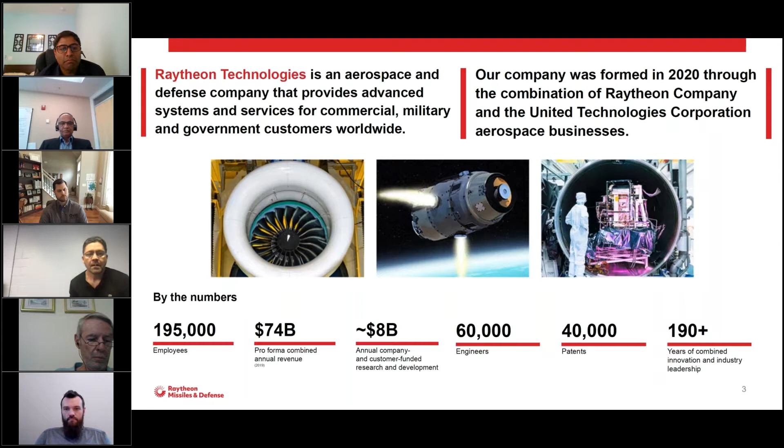Everybody knows Raytheon, I'm sure, on this call. But last year, in the midst of the start of COVID, we shut down in March, and in April they went ahead with the merger to form Raytheon Technologies, which was the union, essentially, of Raytheon Company and United Technologies. I'm not going to read all those numbers, but we were big, and now we're even bigger.

So what is RURI? Some of you may have heard of this, but it's a very different model for working with the university. I've worked with a lot of different universities—you give them a statement of work, some funding, fund a graduate student or two or three, meet with them maybe once a month to see how their progress is going. It can be very interesting and informative, but it often goes in a very different direction than maybe you'd originally hoped for.

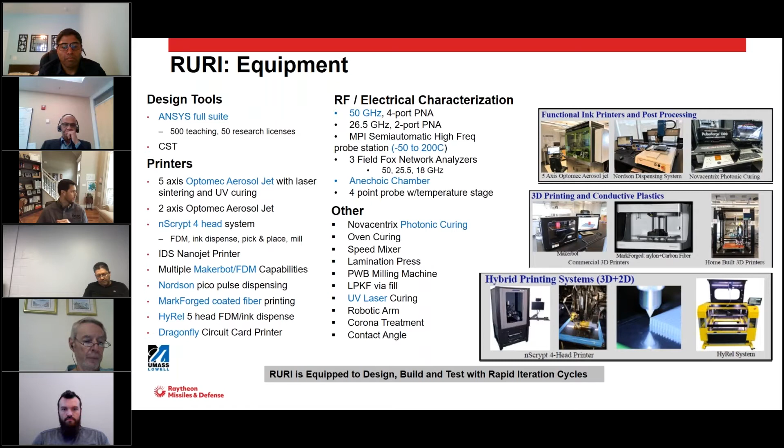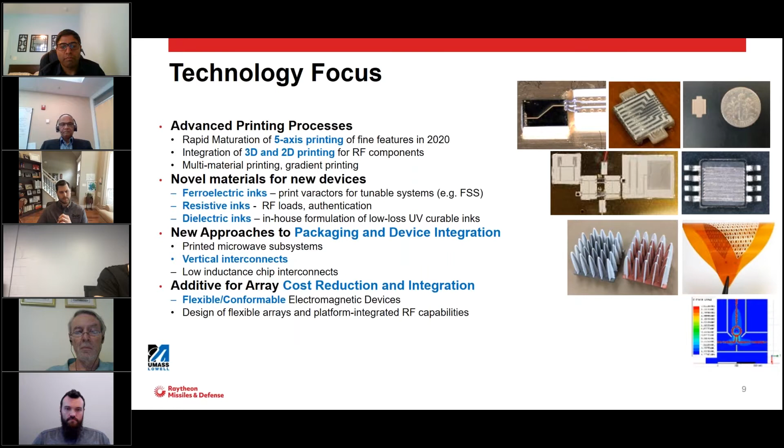I personally was not very involved with this dielectric work, but it's a pretty important feature that we developed through our RURI partnership, so I really wanted to at least touch on it. This is the development of a BST ink, barium strontium titanate. It's been around for a long time, but the beauty of this material is we can basically help control and tune the dielectric properties over frequency.

It has a relatively low loss tangent, 0.01, which for a printable material I would say is very good. We've been able to make a mix of these across various dielectrics, so we're looking at these for a variety of applications.

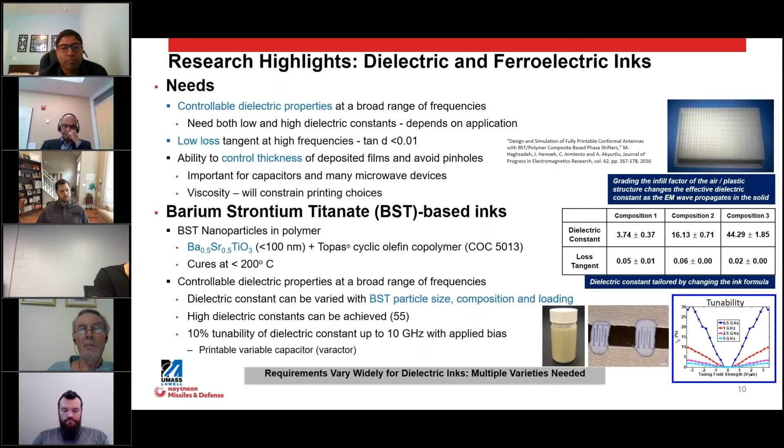Here's one of those applications, which is to make a printed varactor. What you can see in this picture is interdigitated capacitors, a whole suite of printed interdigitated capacitors. Depending on what BST ink we coat on those interdigitated capacitors, we can essentially tune the surface. So this is a very nice development.

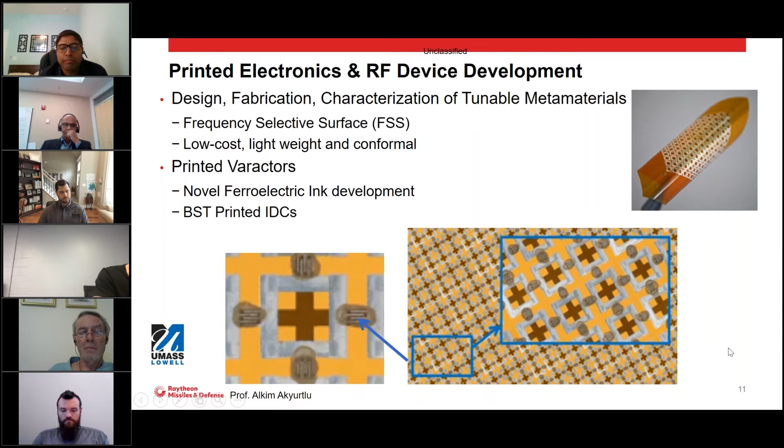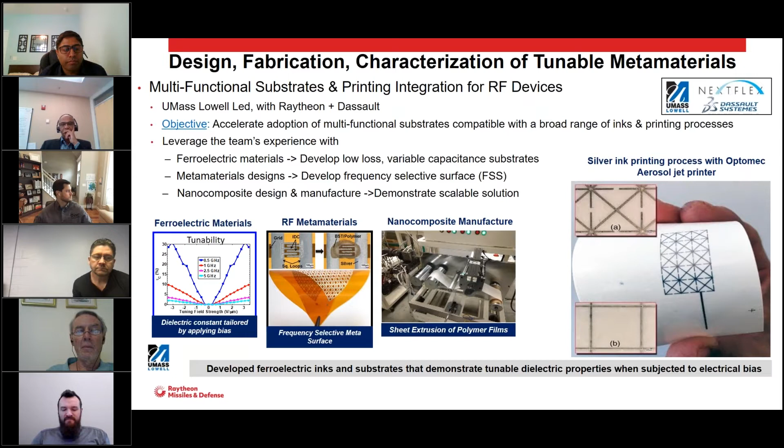We have the opportunity through some of the plastics engineering departments to extrude polymer films and really go into volume with something like that. It's not as much as what I'm particularly working on, but it's an emerging application that we're interested in pursuing for a variety of antennas in particular.

Now we're going to get into more of where I've been focused, which is a lot on what would be essentially the RF front end, transceivers, etc., for radar systems and telecommunications. Before we got into any of the additive world, it all starts on really understanding our material sets.

As nScrypt is well aware, printing has been around for a while, printed electronics has been around for a while. I would say it's only relatively recently that the materials have gotten to be of interest at high frequencies, meaning improvements in dielectrics and conductors. And of course, one of the things was just to develop a very quick, simple way to evaluate a wide suite of materials, both from outside vendors and internal development.

We also have TRL structure, so we can do a full calibration up to 40 gigahertz, and then we can print our lines and really get our insertion loss and see where we are.

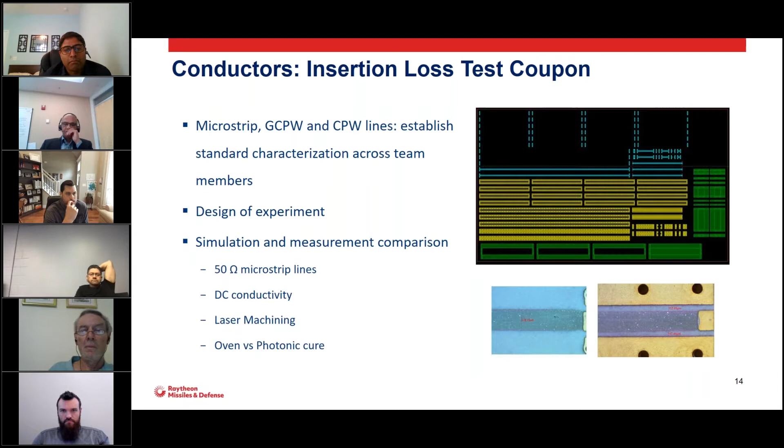Here, for example, is just a couple of inks that we looked at compared to ENIG plated copper. Now pure copper would be a little lower loss, but this is ENIG plated copper, and we looked at various curing methods. So again, a nice screen to see where we were when we were starting.

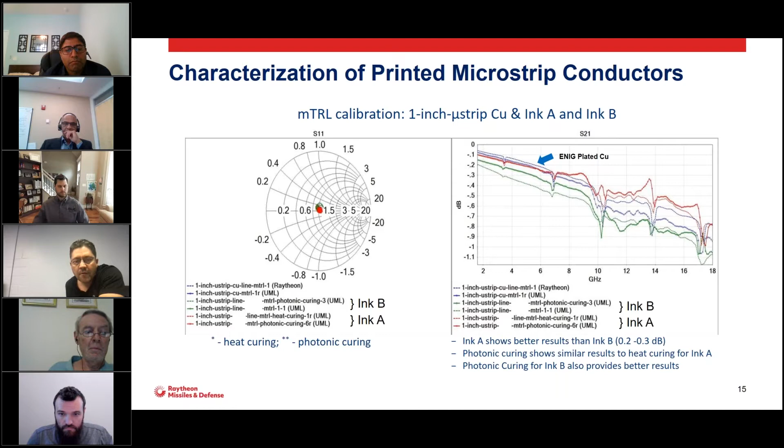We also characterize our dielectrics. We actually make a few of the dielectrics. Our choice is generally to buy our inks - that's always our first choice. We generally make them when we can't buy what we need.

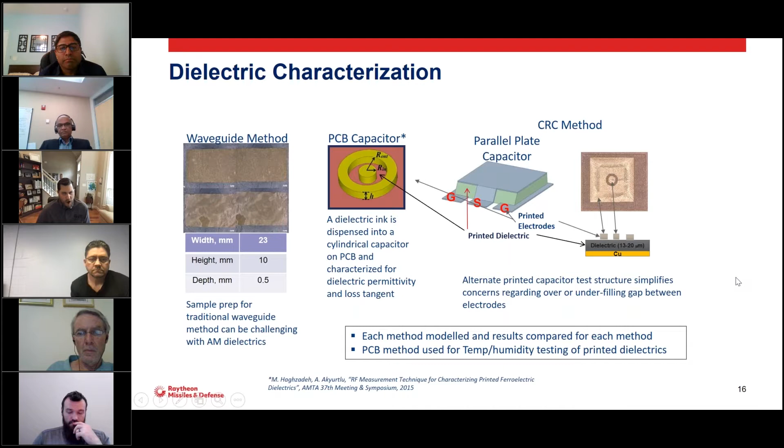So we start with this, we down select, and then we go to the waveguide method. And then once we've done that, there's more to it before we really start to print.

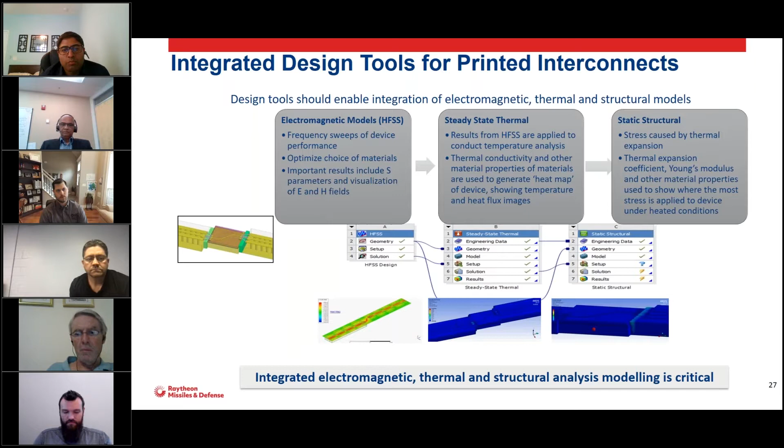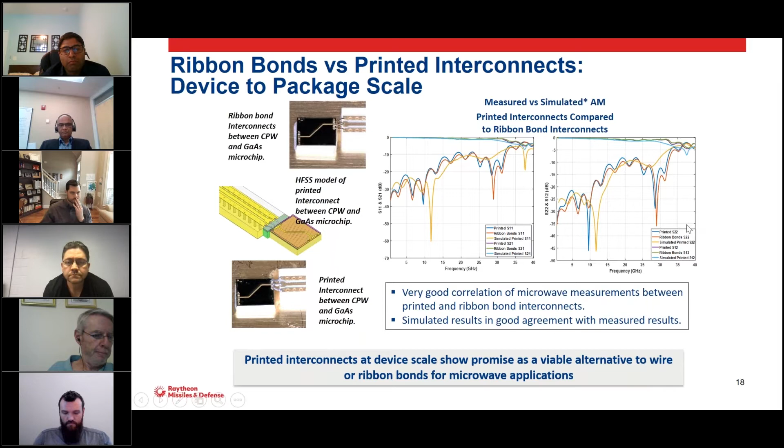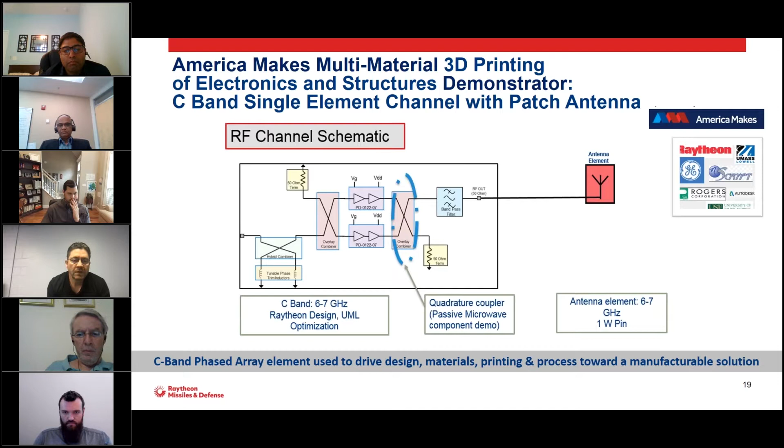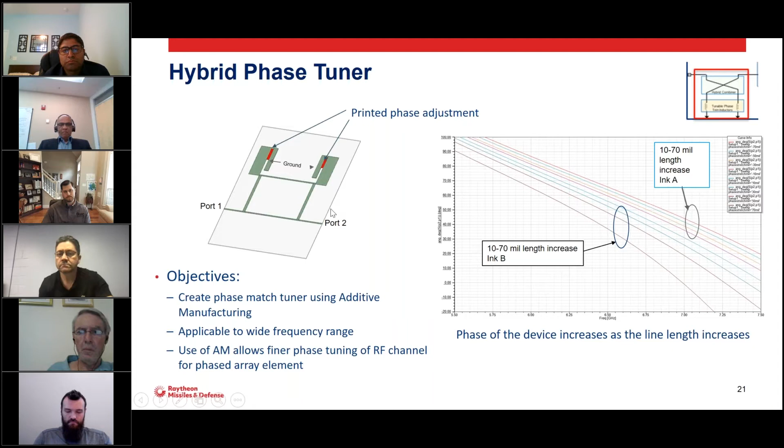So this was our result on our partially printed tuner. We were able to show that we could adjust phase based on the lengths we printed, but that was just our starting point. We call this the hybrid approach versus the fully printed approach. In this approach, we printed the entire metal one and all the vias, so everything there was fully printed, and the print time for that part was about 11 minutes.

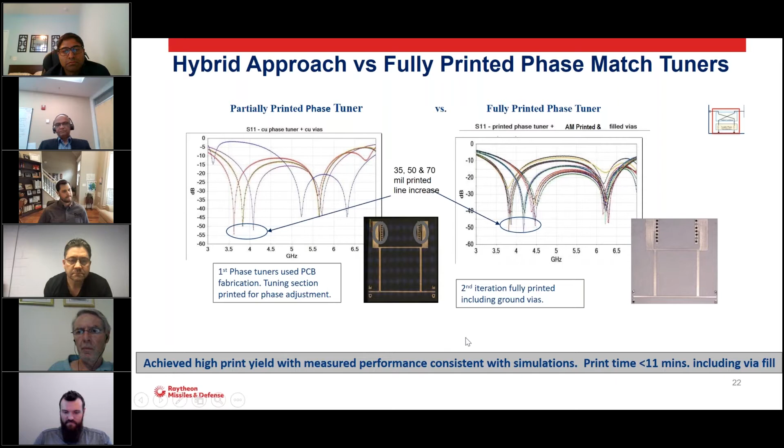It says I may be experiencing network connection issues. Are you hearing me? Is everyone hearing me? Yes. All right, well, okay, good.

I just got cut off, so again, I can't get into all of the various components, but really the takeaway from this slide is that by working through the process, we were able to achieve a significant reduction in print area and a significant yield improvement through our choices of printers and inks and some of the tricks in design that we learned to help facilitate and compact the design.

And we got good results compared to simulation.

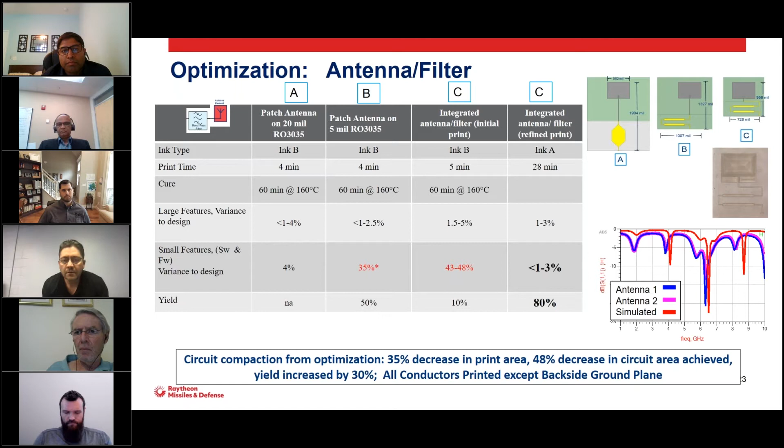So after we made all of these various parts—combiners, phase tuners, filters, antennas—our first approach, what I'd call our hybrid approach, was to take the measured data on each of these hybrid parts, string the measurements together in ADS, and compare that to the simulation end to end. We got good correlation with that.

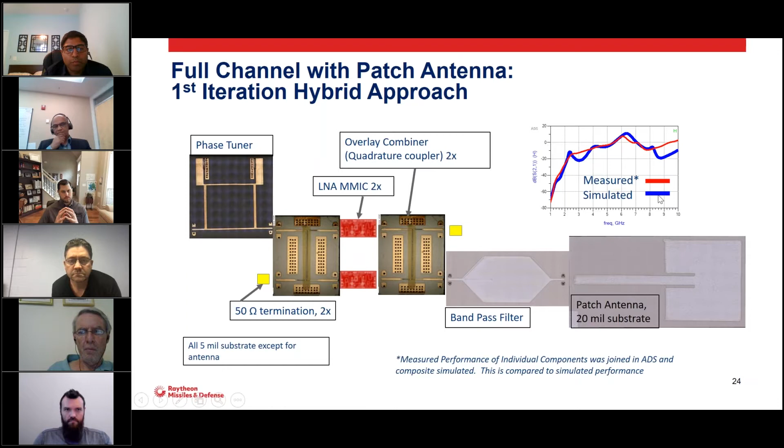Obviously, we wouldn't want to start there—that was just our starting point. Where we wanted to go was the fully printed approach. Although we mounted this all on a plate for simplicity, this is a 3000 series material that's relatively soft. We could potentially bend it in future, but we didn't look at that for this application. Here you can see the condensed bandpass filter and antenna.

The combiners we did not integrate because the yield on these was tricky, to say the least. What you'll see is not printed is the DC bias. All of the RF interconnects are printed, all of the vias are printed. The DC bias was not printed only because the chip we selected had a lot of internal connections that needed crossovers, which we weren't ready to do within the scope of this.

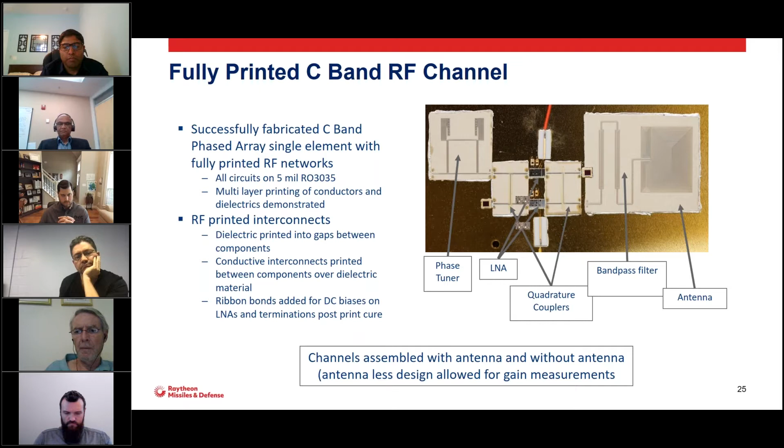So let's go on to this. Here's an example of the stack up. As I said, this is on a heat spreader.

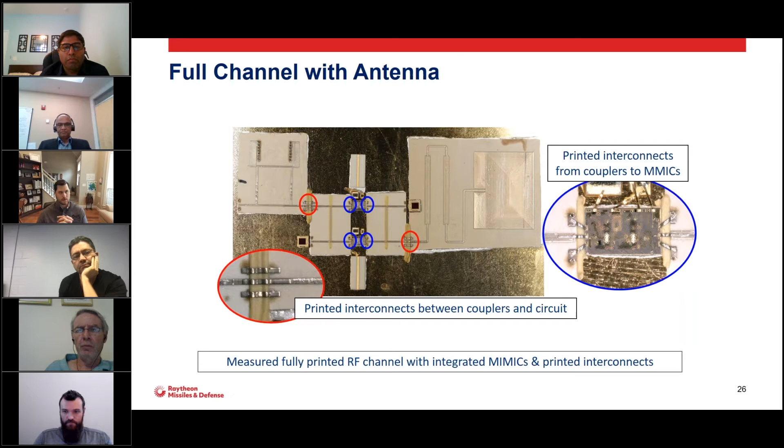Oh, five minutes? All right, let me skip this then because I really want to get to—let's just say we got good data, I'll skip all of that. I want to talk about where we're going and what we need—I think that would be of interest to this group.

These are some of the areas where we really see non-planar, conformable, flexible, reconfigurable, and tunable. These are the things that really matter to us.

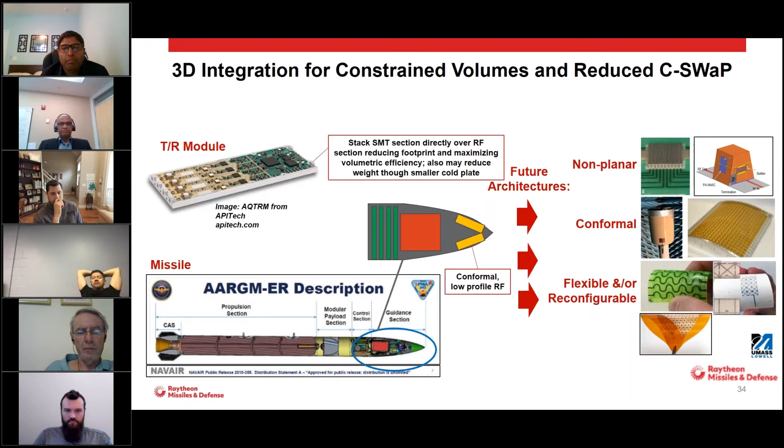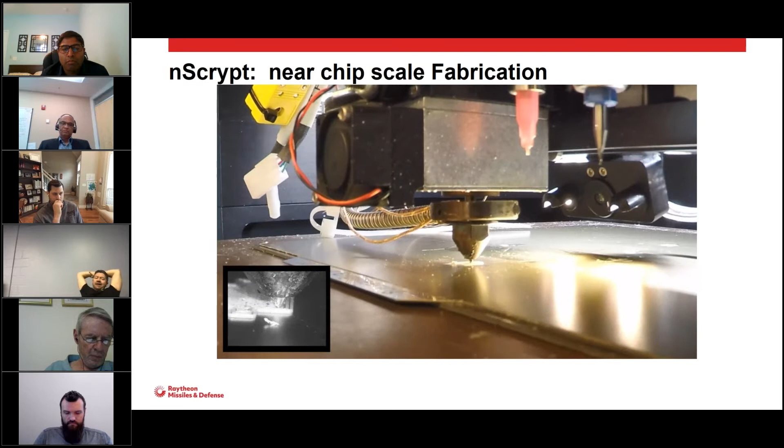If I could take a minute to show you the video, here's an example of us building a non-planar structure at near chip scale on nScrypt, as a matter of fact. We're doing that in PEEK. We're also doing ULTEM.

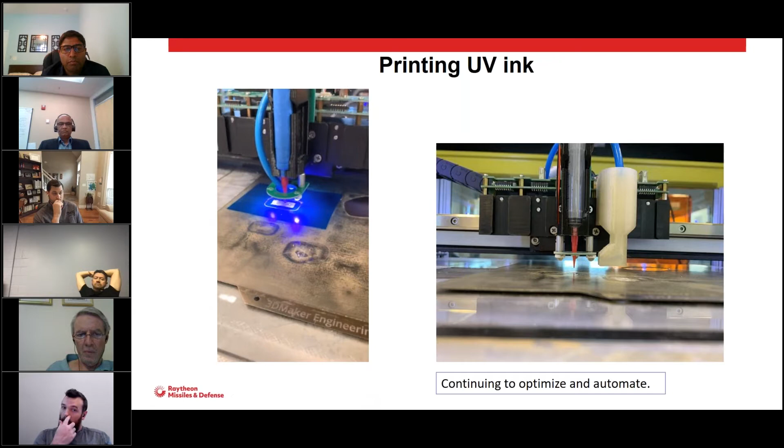Another video I'd like to show you briefly is printing very thin dielectric layers and curing them as we go. We're continuing to optimize that—we think it's essential. For example, if you print PEEK, you have to planarize it with dielectric.

Let me sum up with where we are. Our applications, volume shrinks, are what it's all about—printing at near chip scale, printing matching networks, a new style of interconnects, die embedment. These are all key features of where we're heading.

Another area we're definitely exploring is EMI shielding. We have these bulkhead connectors, and we have ways to get in and print and shield bulkhead connectors and various other applications on the fly quickly, making adjustments. That's a big area. Obviously, conformal antennas, and then our non-planar functionalized structures—that's a really big emerging area for us.

I think you're all aware of some of the issues required. For us to be successful in most of our applications, there isn't one printer that does it all. What we really need is very good fiducials and calibration as we move from one machine to the next. We're trying to bring it down to at most two machines, but we haven't gotten to the point where we're getting it all on one machine. That's an area we would very much like to see improve.

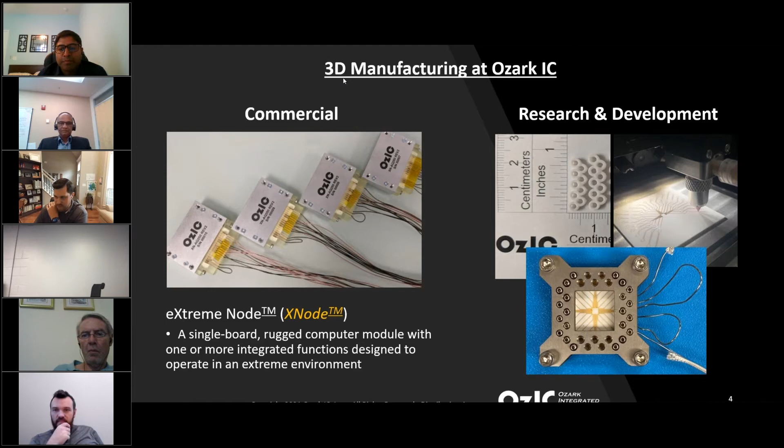To enable operation in any condition, X nodes are built on advanced ceramic platforms. We utilize advanced semiconductors such as silicon on insulator and silicon carbide that can take the heat. We co-design the chips and packages into a design that is compact, small, and right first time. And we use advanced 3D manufacturing techniques that allow us to rapidly integrate new sensors and devices and make structures that simply haven't been possible before.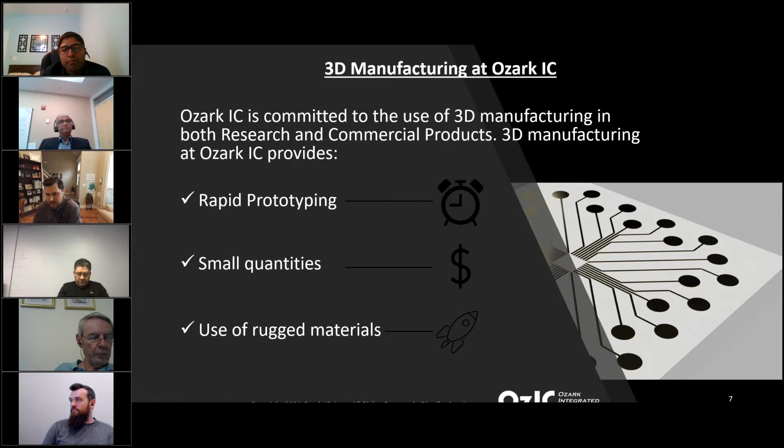Now for a virtual tour of our printers. Ozark IC has in-house 3D manufacturing platforms for various applications. Since temperature is a focus for our business, these platforms can be categorized by the operating temperature range of the products they print. On the far left is our FDM printer.

Our FDM printer is used to print ESD cases and room temperature plastic prototypes. In the middle is our SLA printer, used to print high temperature connectors and ultra high temperature ceramic components. On the far right is our proudly owned nScrypt 3Dn tabletop printer, used to print post-fired thick film pastes onto our ceramic wiring boards. We also utilize the laser system for contour mapping of our substrates. Each printer has a critical role in the development of either a commercial product or a research product.

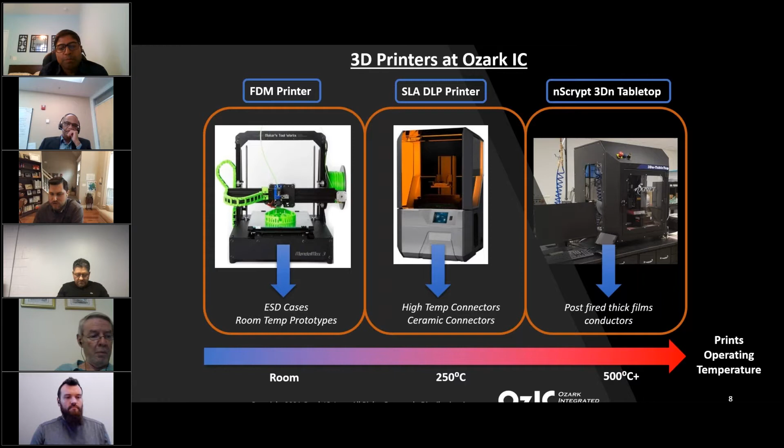Just a little bit on each printer in more detail. No doubt the pioneer of 3D printing, our traditional fused deposition printer is utilized for two important functions. When working with emerging semiconductor processes, wafers can come in several different sizes as well as the die on them, so ESD plastic is used to print custom die packs for these diced wafers that help us store the die and ship them if needed.

Another important use of our FDM printer is for room temperature prototypes. These prototypes are fast and cheap to ensure that when the final print is made in a more costly material, it will be closer to correct the first time. There are also room temp applications, like the vibration setup you see here on the right, that benefit from these plastic prototypes. So this is more of a traditional use of 3D manufacturing.

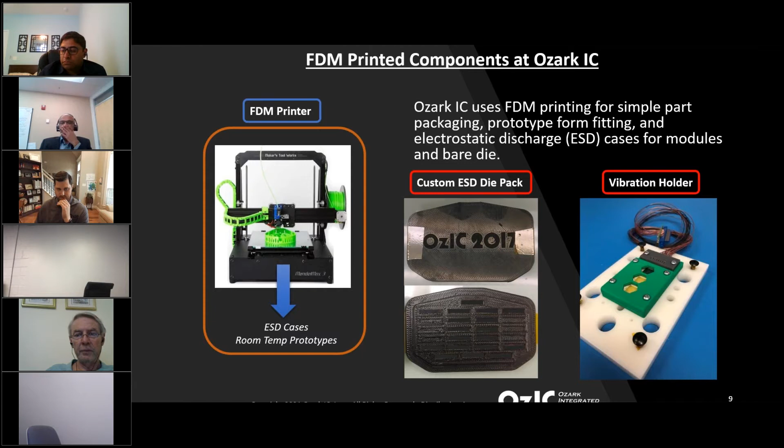Moving up in temperature, we use our SLA printer to manufacture components that can withstand temperatures in excess of 250 degrees Celsius. Our commercial X node, the AQ250 I mentioned earlier, utilizes the SLA printer to manufacture custom edge connectors that allow the single board computer to communicate in harsh environments. These connectors are custom form printed to the shape of the LTCC panel.

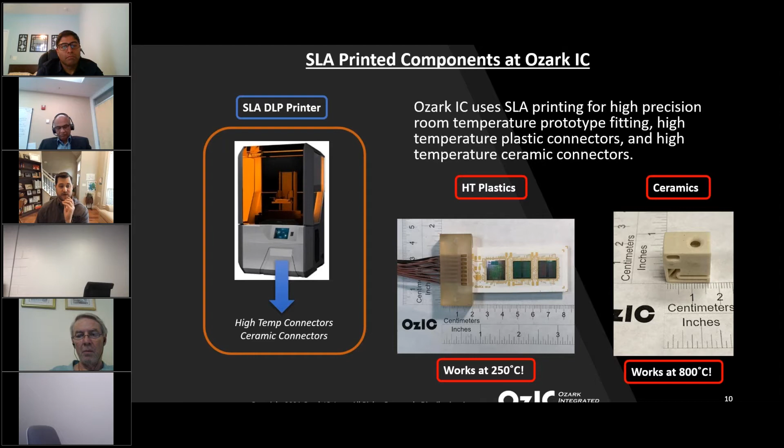And for our 500 degrees C applications, this printer is also capable of manufacturing ceramics. These printed ceramics allow us to electrically isolate conductors on our Venus grade modules, operating in the 500 to 800 degrees Celsius range.

Last but not least is our nScrypt printer. We use the nScrypt to extrude high viscosity post-fired thick film pastes on ceramic substrates. These ultra-high temperature printed wiring boards can be quickly manufactured on the nScrypt and integrated with our silicon carbide chips. These modules have demonstrated reliable operation at 500 degrees C for over 1,100 hours.

An added bonus of this machine is the laser height scanner, which we use to map the contour of some of our LTCC modules.

And I've got a little video here of the nScrypt doing its work.

Since acquiring the nScrypt, we've been putting it through its paces. We've pushed a lot of paste through it. We find an excuse to use it just about every day, so we love it.

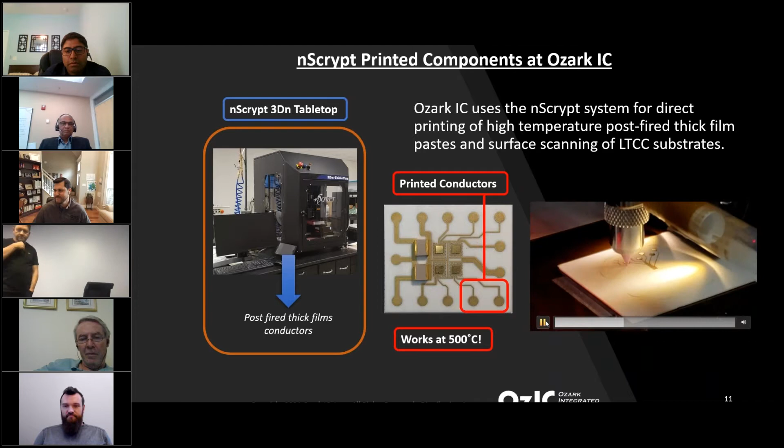It is no doubt that 3D manufacturing has provided the necessary edge for our products, and we are absolutely radiating with enthusiasm about it. Again, thank you very much for taking the time to listen, and thank you for inviting us. Hopefully we'll get to do this again next year.

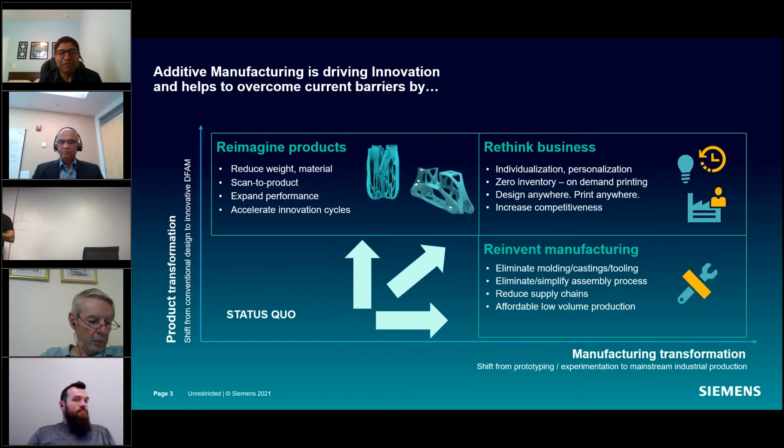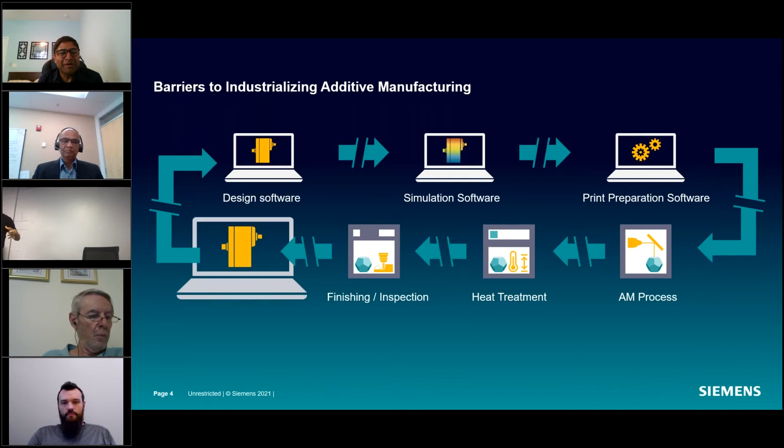The main issue we also see with additive manufacturing is the disconnected software. So right now, if you look at software, you have to design in a certain package, and then you have to simulate it, and then you have to take it to the build preparation stage where it is on a printer OEM's configuration, and then you again have to go through the AM process, bring it to heat treatment, finishing, and then have an end-to-end part. So again, a lot of conventional thinking involved.

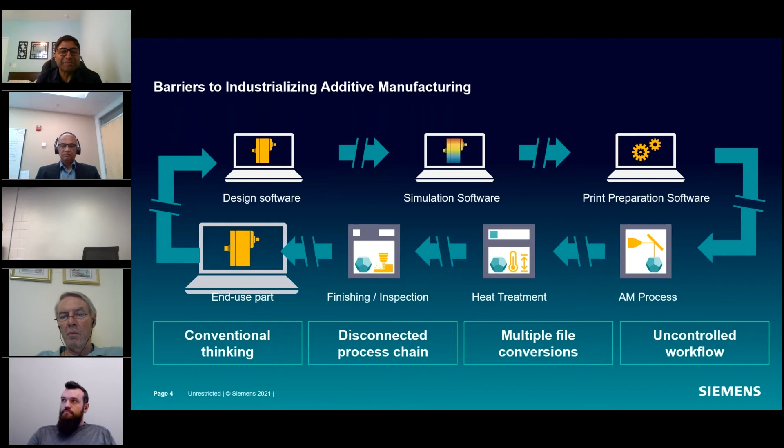It's a disconnected process chain. There are multiple file conversions that you have to do, and it's an uncontrolled workflow. So that's where Siemens has been driving its innovation - how do we have one package which the designer can see the whole thing. So all the way from designing to simulation to actually doing the post-processing and inspection as well. And that's what we do on our current platform.

Again, this is for conventional, but in the last slide you'll see we have taken it to the electronic side as well. So again, all the way from order management, design to additive, bringing in advanced things like generative design, design validation of it, build preparation, build simulation, post-processing - all of this analytics is done.

And it's not the end. I mean, if you look at it, we now have to go into futuristic things, which is multidisciplinary generative engineering, multi-physics simulation. As Susan said, we are also doing the electronic and mechanical and thermal simulations, which will be needed for the electronics as well.

First time done right - this is a new thing that we are bringing, where it's again simulation driven, spending a lot of time. Right now additive is still trial and error. Once you print, you know where the issues are, you reconnect it or correct it and reprint it. So this is where we found out that the simulation aspect of it is greatly helping.

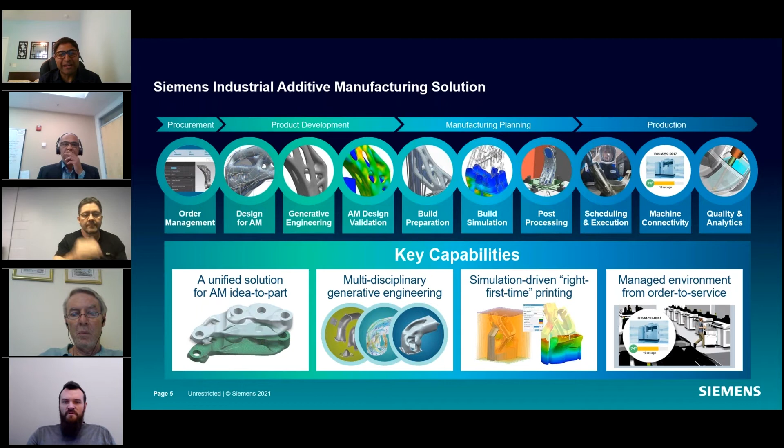So this just gives you a flow of where we are with the conventional additive. We have a lot of printers and printer OEMs we are working with that help our day-to-day problems.

But going forward, we just wanted to share where the market size for printed electronics is. So again, this is something that my colleagues in Germany are doing, and we are seeing that sensors and conductive inks are the main market values for printed electronics. And you can see the market is just growing from 2018 to '29 - you're actually more than 8 billion.

And again, all the application industries are mentioned here. You have electrochromic or sensing, you have conductors, batteries, photovoltaic. So potential is there for this technology to be implemented in multiple of these applications.

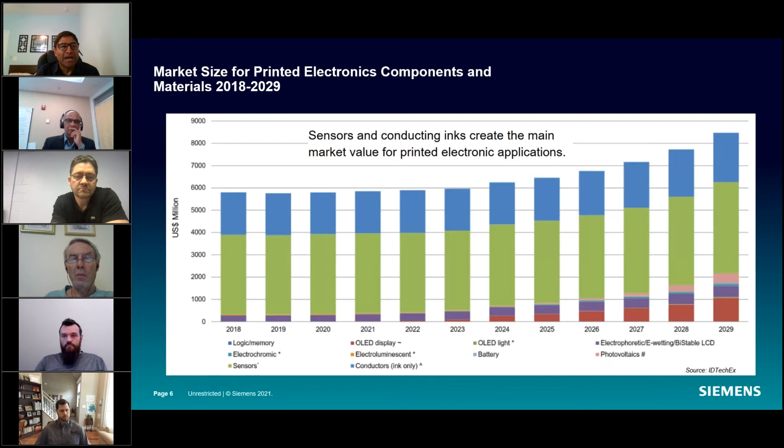Where and which one is driving? If you look at this, screen printing is the only technology which has kind of taken it to commercial products. It's the most dominant market, I would say. But all the other ones are also - you can see they're slowly making transitions. So going from printing functional inks, there's the slot die coating technique which is used in electrophoretic.

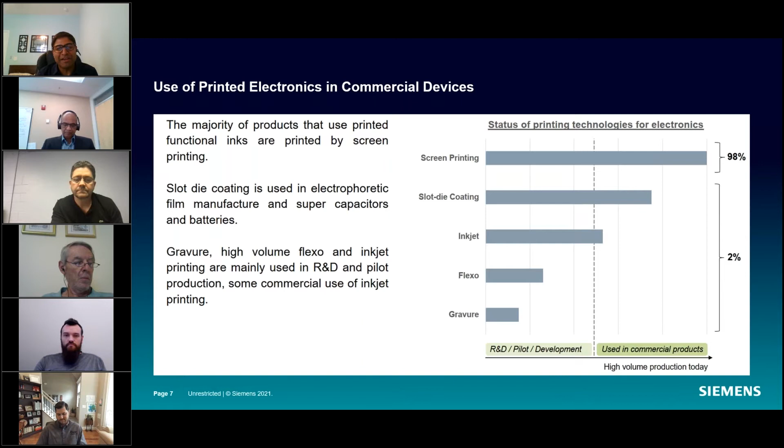It has now gone into batteries and supercapacitor side, and then all the other ones where inkjet is where nScrypt is. We are seeing a slow transition from R&D to going into more commercial products, and we ourselves are doing the same homework as well, identifying which of our controller boards or circuits can be made with this. So identification of the potentials, and then working with nScrypt on how do we make these possible. The technologies are there, they just have to make that transition, and you guys are already aware of which ones they're helping with.

What's the motivation behind it? If you look at where the electronics is right now, all the old circuits that are there, the OEMs are not existing anymore, or they have moved on to advanced products. So kind of replacing the whole existing device is one effort, and although it requires high investment, if you look at military, with the circuitry they want to have these products. So there is a potential there.

The second benefit is improvement. How do I take this printed electronics to offer value, change, add, or functionality to an existing product? And then the third is quite new: how do I bring new products or complete solutions? So again, we are looking at collecting data that is not previously done when it was actually made, but it also allows a lot of potential in that regard.

This is a slide from my German colleagues where they are looking at technology scouting with a bunch of partners. It's part of their KEX studies, where they have a few institutions on Nano Dimension evaluating inkjet printing. With Optomec, it's the aerosol jet. With Neotech, they're looking at nanojet. With TNO, it's SLA and dispensing. With Fraunhofer, they're looking at 3D dispensing. And with Hamburg, they're looking at FDM and dispensing.

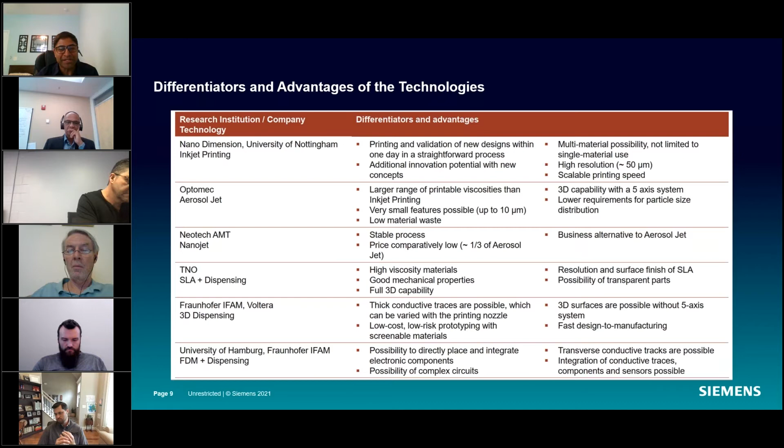I'm not going to go into details, you guys are aware of all of this, but the main benefit is the technologies are there. It's the materials portion that's where the development is needed, and that's where we would be focusing on going forward.

So this is our relationship with nScrypt. As Siemens, we have a large portfolio that have products which go all the way from design to development of electronic systems and circuits. We are identifying the circuits that can be developed with this technology, and we're working with them on digitally integrating their product into our NX platform or AM platform. That way you can start imagining new things: is there a new tool path possible to do multi-material deposition or functional graded material deposition? This is part of an effort we have just started.

Like I said, we have our printer which just came a month and a half back. We have been trained on it, and now we're closely working with nScrypt to make the digital journey as well as the hardware journey possible.

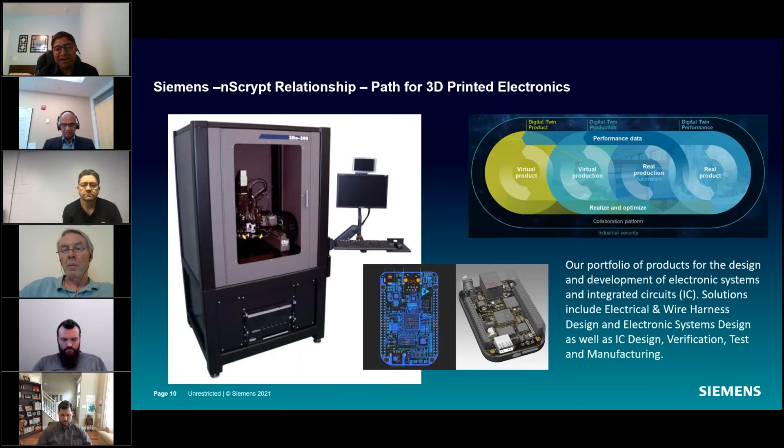You have 5 minutes, Anand? All right, I have a few more slides.

On the digital side, again, I don't have to preach, you guys are aware of everything that we do here. But if you look at the 5 areas, the digital integration or improving the engineering productivity, there is a lot of things already available. The whole tool chain requires electronic to mechanical design, and we have decades of experience in PCB manufacturing, so that's where all that experience comes into picture. With engineering productivity, there are a lot of challenges, right? There's bare or buried ICs, passives, localized dielectrics that are needed. So again, we have to look at all of that, and that's where the digital twin or simulation-based efforts bring a lot of potential.

And then the last thing is, how does this printed electronics, the printed IoT, talk to the larger system? So how do we enable that communication is what the focus would be. And on the last topic, the supplier strength, again, I showed you all the digital tools - generative design, machine learning, AM - it's part of a large portfolio. And as we get more and more data, all of that will be enabled with these software solutions.

So where do we as Siemens see potential? There is a lot of potential for printed electronics in condition monitoring - putting sensors, and Susan showed that, and even on the healthcare side, Sudhir showed that. So lifetime analysis or predictive maintenance is a big aspect.

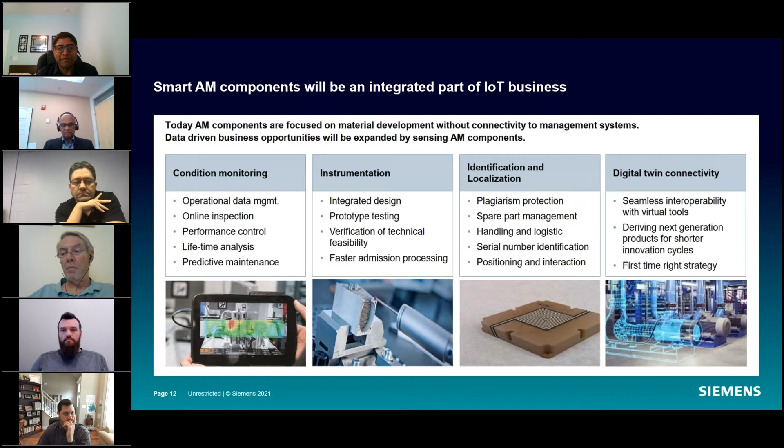Instrumentation - how do we integrate these prototypes into design and then quickly validate that, so we can have products out to market faster. Identification and localization - this is spare part management, handling, logistics, or serial number identification, where sensors play a major role. On the digital side, we are deriving next generation products with shorter innovation cycles, and these sensors will drive that. This first-time-right strategy is where we think we can push with the printed electronics platform.

For us, we are integrating all of that as an additive manufacturing network - a capability where all of these tool sets are available, supporting technologies from SLM to multi-jet fusion to E-beam, and electronics 3D printing is also part of it. Here people can upload their models or drawings and see the potential cost compared to conventional methods, and what opportunities are available on which printer. This is something we show as a service, available to everybody who wants to try out or explore additive manufacturing without knowing which product is right for them. We've just started this, and it's growing with the growing number of printers coming into the market.

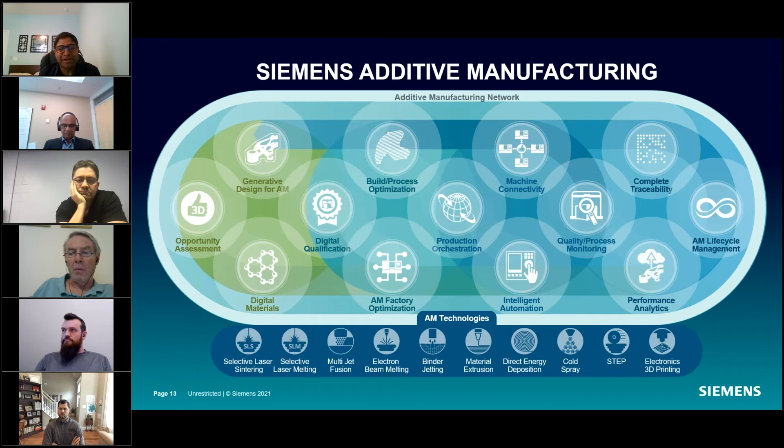To summarize, the maturity of technologies we've seen is too low in terms of TRLs - we are at TRL 3, 4, maybe 5. But the path is there, and one technology like screen printing has made it out of that stage. Material requirements - currently everybody is developing these; if you look at current electronic-level material properties needed, it's still in development. The focus right now is still on prototyping and instrumentation. But it's changing with every new material, dielectric, or conductor being developed. From a development standpoint, we feel developing materials and printers to meet state-of-the-art electronic requirements is the first key.

Multi-material deposition is where integrating the software aspect is also of interest. We need to look at new solder or assembly strategies with 3D printing, having integrated printing strategies - this is where the digital twin plays a key role. Printing interconnects and plug solutions for signal read and readout is a key need. Interoperability, and integration and automation strategies with conventional manufacturing - there's a lot of investment already done there, so if we show it as a replacement, it's always going to have a barrier.

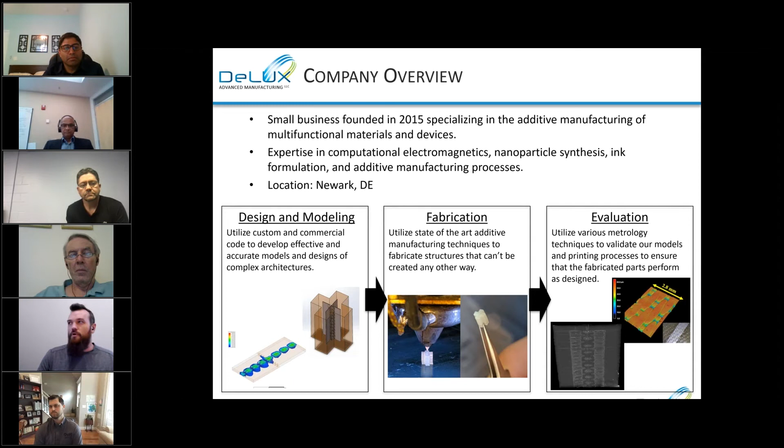So basically what I'm going to go through here is a few examples of materials, processes, and devices that we make, that go into a larger suite of things that we do and make. We do a lot of R&D, SBIR efforts, and then consulting for larger corporations, and we're starting to do some small scale production of some devices I'll talk about in a minute.

So the first thing I want to talk about is printed antenna arrays with integrated RF connectors. Printed antennas have been around for a long time. People have been doing printed antennas, you've seen them for a long time.

I've heard Ken say a few times the antenna is the easy part, and frankly, I kind of have to agree. The radiating element is the easy part. The harder part is everything that goes before it - all of the amplification, the connectors, how you feed it, how you do all of those things. And additive allows you to have a unique approach to that.

So the first thing I want to talk about is our printed RF connectors. It addresses a historically common issue people have: they print an antenna, they print an RF system - how do you get signals in and out? A lot of times that means you take a commercial off-the-shelf connector, you conductive epoxy it on there, and you introduce a bunch of loss to your system and degrade your performance.

So we decided to tackle that problem by developing fully printed connectors that you can integrate directly into your build, eliminating your need for soldering, post-processing, etc.

And you can see it's not a trivial problem. You're making a complex part with small features, and then you're also tuning it for RF performance. So there's a lot of design and simulation that goes on there. And then producing your actual build file presents its own set of challenges.

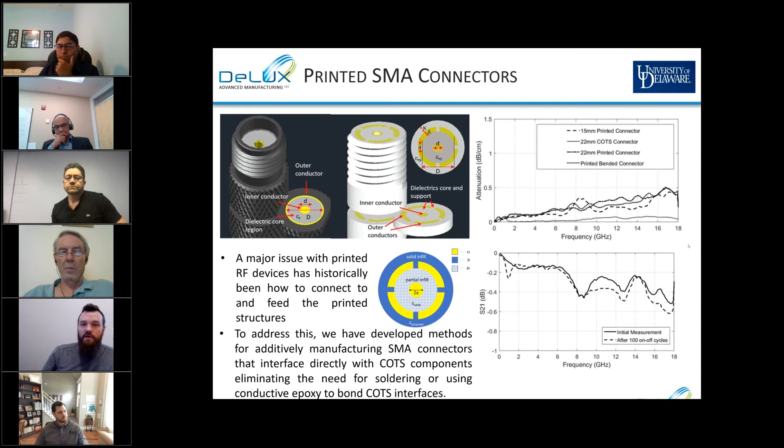One of the challenges we came across in developing these connectors is we're creating these long, high aspect ratio channels. As has been mentioned previous to this, a big challenge is printed conductors.

So upon our initial design and build of these, our performance wasn't matching simulation. Right now, our favorite ink - we characterize every new ink that comes onto the market as soon as we can get our hands on it - and right now our favorite commercially off the shelf ink is from DuPont. It's KA802. To our knowledge, it's the first ink that was designed for micro dispensing.

DuPont came to us, asked us what we liked and didn't like about their inks, and we went through an iterative process with them, and they generated KA802. It's an excellent ink if you're printing onto surfaces, doing complex features, small features, high conductivity, and it's a fantastic ink for basically every application we've come across except for this one, which is filling these long high aspect ratio channels.

We came up with two solutions. One was to vastly slow down our printing process and do very incremental small layers with a full cure of every small layer, allowing it to drive off the gases as we go up in height. That takes way too long.

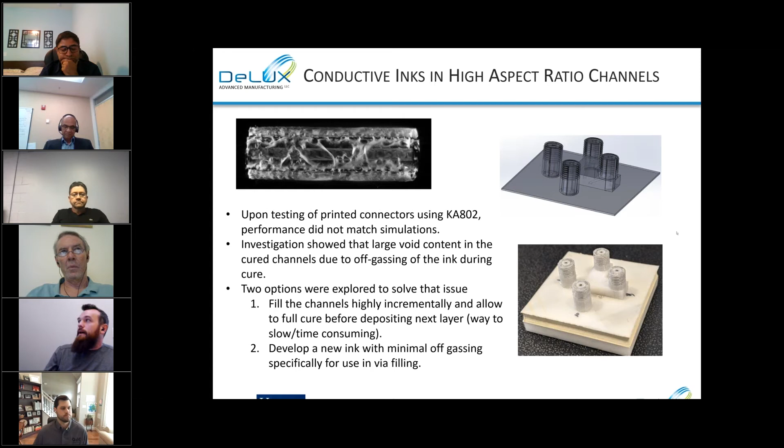So our next step was to try to develop our own ink based on what we know about the challenges and problems. And so we developed a silver conducting ink specifically for high aspect ratio channel fills.

So we're able to drive that performance back up to where we deem acceptable, getting printed connectors with attenuation constants as low as 0.3 dB per centimeter, which we find to be pretty acceptable for most application spaces.

So now why are we doing that? Here's a specific application we have: a fully printed antenna array. I'll talk more about this antenna array as I go into the next section, but it's dual band nested patches.

We're operating over 2 frequency bands, and these interior patches are all dual polarization as well. If you want to feed these center patches, you don't have the physical space to put 2 connectors for a straight line feed from the backplane to the radiating patch. So we have to do some 3-dimensional routing, and these printed connectors allow us to do exactly that, feeding something you wouldn't have been able to feed with a commercial off-the-shelf connector.

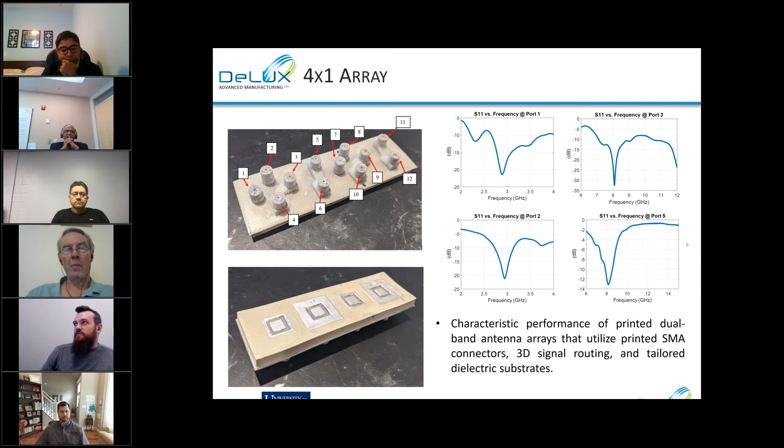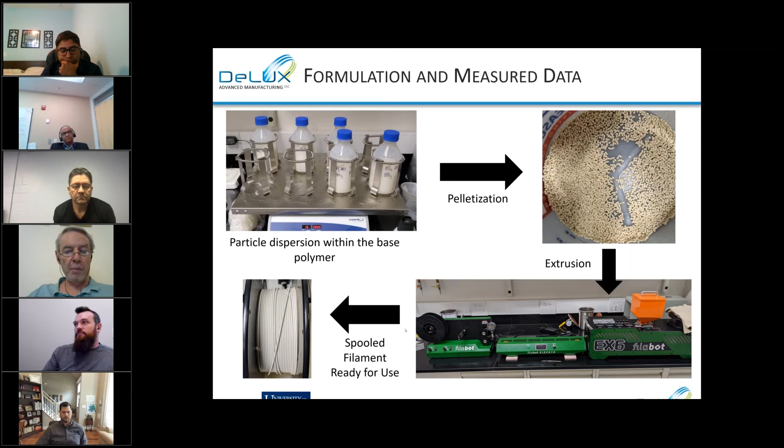We disperse dielectric particles within our base polymer, pelletize those, run an extrusion, and create spools of filament. For something like this dual nested patch antenna, to get the performance we need, we're actually using 3 different dielectric constants all in one single substrate.

This outer area has a dielectric constant of 6.2. The inner area is a dielectric constant of 2.68, and then there's a top portion with a dielectric constant of 2. To get all of those dielectric constants into one 3-dimensional substrate with printed conductors on the surfaces and embedded within, without additive manufacturing you'd have a ton of piece parts and a difficult time making that antenna substrate in general.

You have 5 minutes. Gotcha, thanks.

We're able to exceed that now. We can do spoolable, printable filaments with high levels of consistency, up to a dielectric constant of about 7.5 at this point.

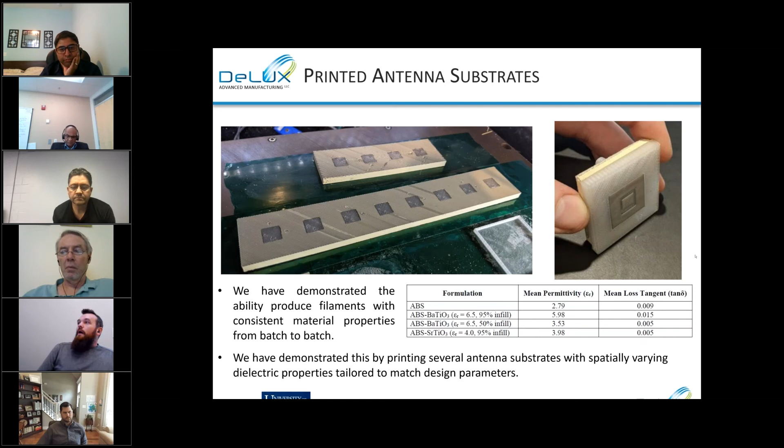Another application space for this is in graded index structures. This is sort of what DeLUX is most known for, and if you've seen any of our work before, you've probably seen us talk about lenses. We're able to make some very unique graded index lenses, and now even more unique ones by producing larger quantities of tailored dielectric filaments.

Here is a lens we made off of a flat back feed plane. We're able to get plus or minus 55 degrees of steering and beam forming. We're working to drive that out as far as 70 degrees, which we're only able to do by tailoring the dielectric constant of our feedstock when we're printing.

This has a wide range of applications. One of the products we have in small scale production at this point is radar detection systems. We have passive systems you can set out that use a passive lens to let you know directionality and intensity with which someone is looking at you with an RF signal over a broad band of frequencies.

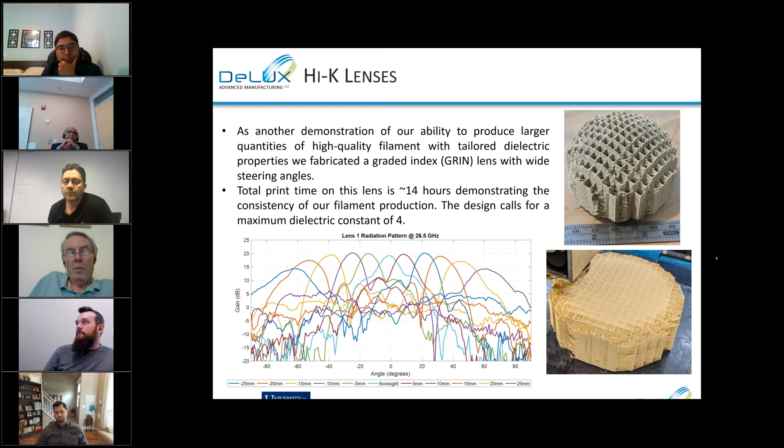The final application space I wanted to talk about is custom horn antennas and orthomode transducers. This is a unique project that came across us in recent months. We were tasked with creating a dual polarization horn with a custom radiation pattern operating within the X-band, with 30 dB of cross-pole isolation.

Our solution versus the COTS solution was a 5x weight savings. This is for an aerospace application, so 5x in weight is significant. And then 3x cost savings, and we're able to fabricate an entire horn orthomode transducer and assembly in under 7 hours. So with additive manufacturing we were able to produce the beam pattern they desired, the cross-pole isolation they desired, and the return loss values they wanted, in a package that was 3 times cheaper.

5 times lighter, and the entire development cycle, from them coming to us with the problem to them having the devices in their hand, was 2 weeks. That's something you just wouldn't be able to do with commercial manufacturing processes.

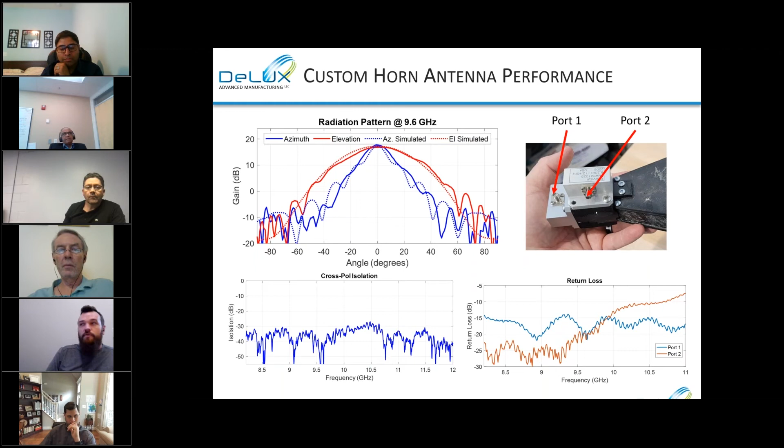These all build on a single build plate. The nScrypt allows us to polish surfaces and metallize them so that we have very low levels of surface roughness, and we're able to make devices that are really unique within the RF space, ones you just wouldn't be able to produce in the same time or at the same performance values through traditional means.